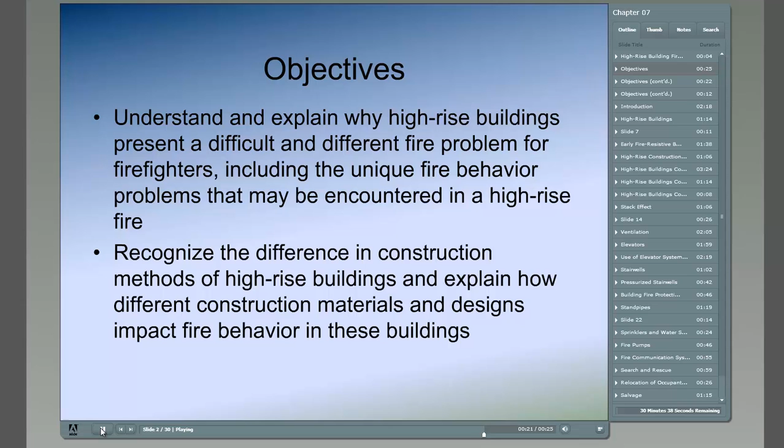The objectives of Chapter 7 are to understand and explain why high-rise buildings present a difficult and different fire problem for firefighters, including the unique fire behavior problems that may be encountered in a high-rise fire. Recognize the difference in construction methods of high-rise buildings and explain how different construction materials and designs impact fire behavior in these buildings.

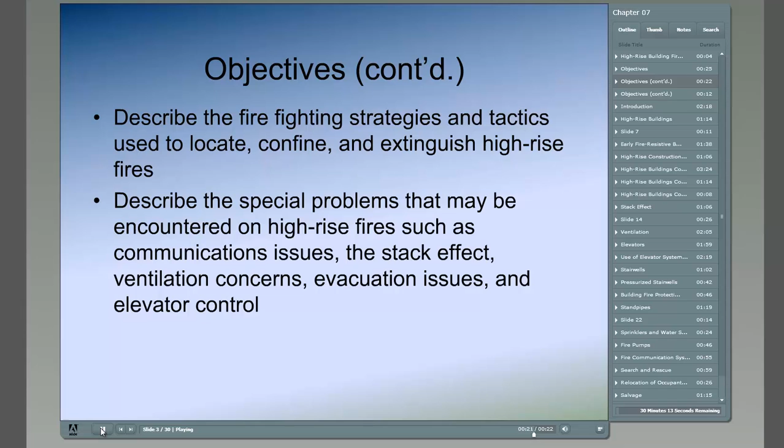To describe the firefighting strategies and tactics used to locate, confine, and extinguish high-rise fires. Describe the special problems that may be encountered on high-rise fires, such as communication issues, the stack effect, ventilation concerns, evacuation issues, and elevator control. To describe and explain the purpose of special fire protection equipment which may be found in high-rise buildings. And finally, to describe when a stairwell support system may be needed.

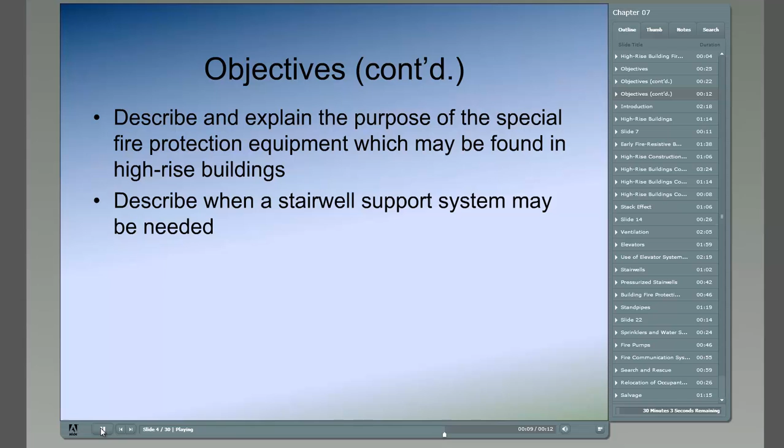Development of vacant land in large cities has resulted in a tremendous increase in property values. As the amount of available land becomes scarce, the cost of land increases, resulting in building developers building upwards rather than purchasing additional land to build horizontally. This upward growth has resulted in high-rise buildings, which are defined by the National Fire Protection Association Standard 101 Life Safety Codes as buildings more than 75 feet in height, where a building is measured from the lowest level fire department access to the floor of the highest occupiable story.

There are variations in code definitions of high-rise buildings throughout the country. For firefighters, the best policy is to check locally for appropriate code to obtain a better understanding of the code specifics. Almost all of the definitions indicate that these buildings have floors higher in reach than fire department ground ladders. This requires fighting the fire from inside the building.

Upper floor fires present firefighters with a different set of problems than those encountered in buildings that can easily and quickly be reached from ground level. While the basic firefighting tactics used on high-rise fires are the same as those used on most other structures, these buildings present special considerations and problems.

The building may contain multiple occupancies, such as apartments, commercial stores, restaurants, and extensive parking facilities. The height of the building presents an opportunity for greater smoke movement within the building. All firefighting equipment, supplies, and human resources must be delivered to the upper floors, a labor-intensive task that requires additional personnel. Access and egress from high-rises can be difficult under emergency conditions, as occupants and firefighters are required during some emergencies to use the same stairwells to exit and enter the building.

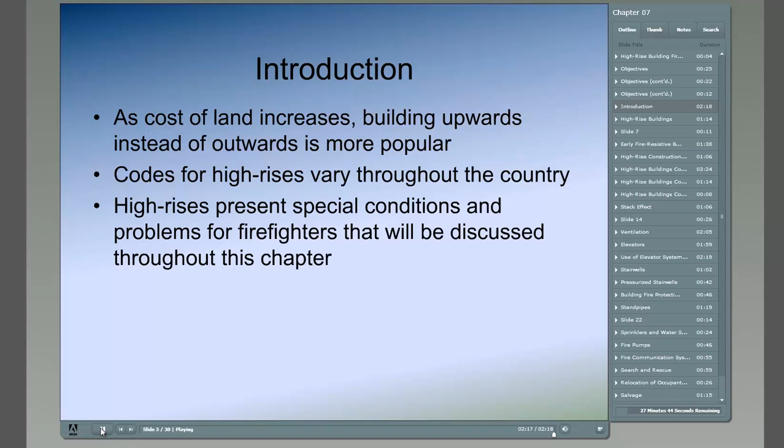According to the National Fire Incident Reporting System, NFIRS, for the period from 1996 to 1998, there were 15,500 high-rise fires in the United States. These fires resulted in $252.3 million in annual property loss and 930 civilian injuries, including 60 civilian deaths. While 75% of these fires were in high-rise residential properties, they caused only 25% of the total dollar loss. The main reason for this is that high-rise residential fires tend to be contained within one room, whereas 75% of the fires in high-rise manufacturing, industrial, and storage buildings are not contained to the room of origin.

Occupants of high-rise buildings face several important issues in terms of fire behavior and safety. These issues include the manner and materials of construction, as well as the building contents. Firefighters categorize the construction materials and designs of high-rise buildings into three major time periods. Each time period has a distinctive construction design and use of construction materials.

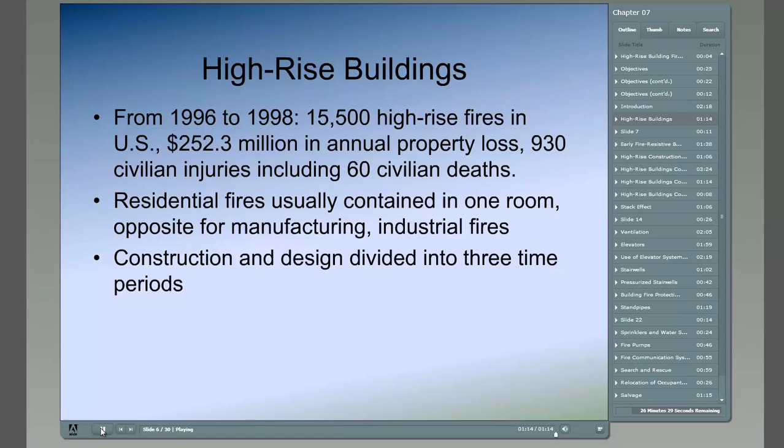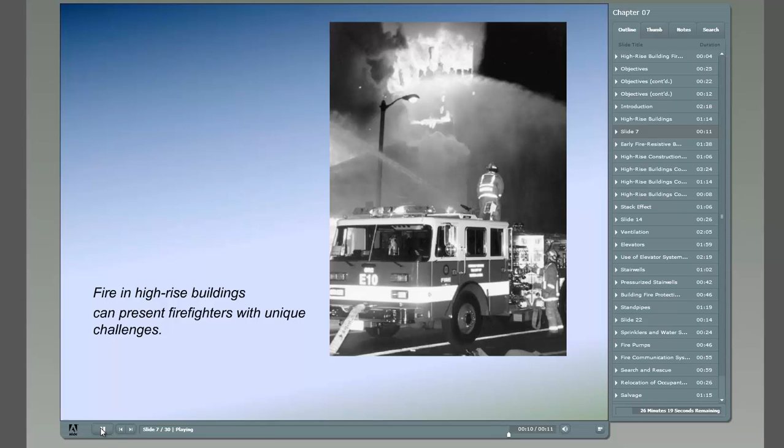Structures built from 1870 to 1920 were constructed with little or no concern for fire safety. At the time, there were no standards for the protection against heat for buildings' steel components. When heated to a little above 1000 degrees Fahrenheit, steel quickly loses its strength. Steel also expands at the rate of 0.06% to 0.07% for each 100 degrees Fahrenheit. This means at 1000 degrees Fahrenheit, it will expand about 9 inches for each 100 feet in length.

In a masonry building, where steel beam expansion is blocked by a wall, the steel can cause a partial or total wall collapse. Some of these early buildings were built with floors supported by concrete piers, which created an open void space where fire and heated gases could move underneath the structure.

To prevent fires from spreading from these open spaces, some building contractors used terracotta tiles to provide fire resistance. These tiles were effective as long as they did not contain holes or poorly cemented joints, which would create open spaces and allow fire to spread. Most construction work used the least expensive materials and workmanship of poor quality, resulting in a fire which would quickly spread throughout the entire building.

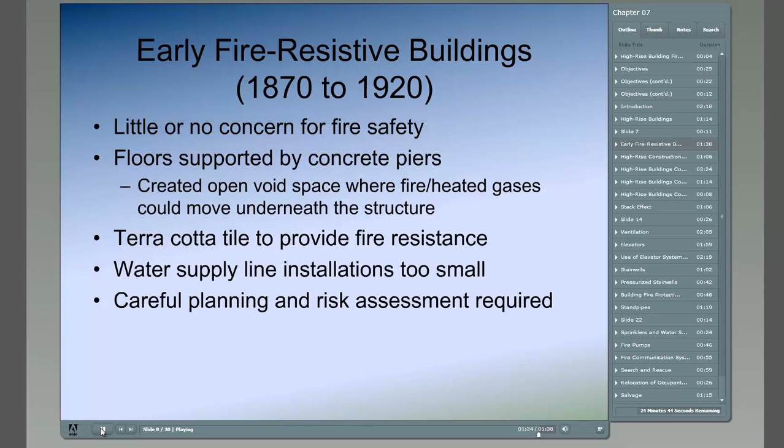Some of these buildings were equipped with standpipes, but most water supply lines were too small to effectively deliver the amount of water needed during a fire. Pre-incident planning is recommended for jurisdictions that have older buildings remaining. Careful planning and risk assessments should be done as well.

Buildings constructed from 1920 to 1960 have important fire safety features that were lacking in earlier buildings and have some features not found in newer high-rise buildings. These buildings were framed and tiled with concrete or masonry for fire-resistant protection. Concrete steel reinforced columns spaced about 30 feet apart supported the floors, and each floor was served by several widely spaced concrete encased steel stairwells.

The windows on each floor could be opened, allowing firefighters to ventilate. Many of the windows leaked air, so movement was within the immediate floor rather than throughout the entire building. A good example of this type of building is the Empire State Building, which was built in 1930.

Its thick masonry walls resulted in the building weighing about 23 pounds per cubic foot, while newer high-rise buildings using drywall are approximately 7 to 8 pounds per cubic foot. The added mass will absorb more heat from a fire than the lighter built building.

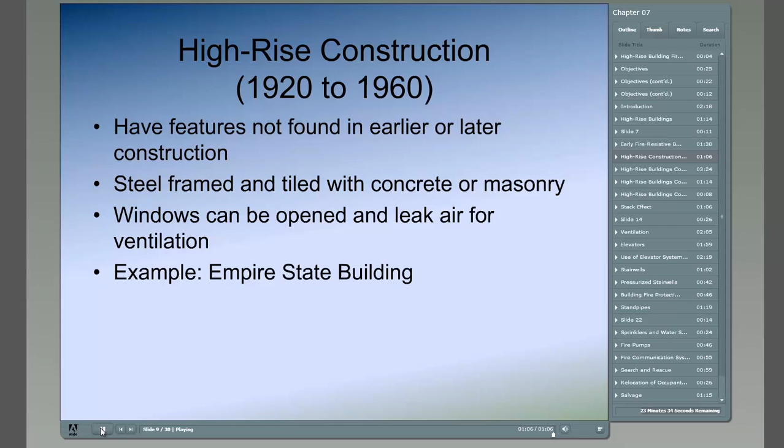Buildings constructed after 1960 are the modern steel and glass buildings found in most downtown areas. These buildings differ from earlier high-rise buildings due to new construction materials, methods, and systems. They use gypsum wallboard and lightweight concrete for fire-resistant protection, and also contain central core construction, using central heating units, ventilation, and air conditioning systems for heating and cooling.

The product called gypsum board has gypsum material pressed into sheets, 4 feet by 8 feet or 4 foot by 12 feet in shape. The gypsum is held in place by two pieces of heavy paper to give it shape. The board can be nailed to wall studs or fastened with screws into metal studs. It is relatively light in weight compared to other concrete products, but the strength quickly fades when the material is wet or suddenly hit.

On September 11th at the World Trade Center, sheets of wallboard were knocked off the stairwell walls by the impact of the aircraft. This caused the displaced sheetrock to block stairwells and trap persons by blocking movement up and down the stairwells. This week's video will go into more detail about that.

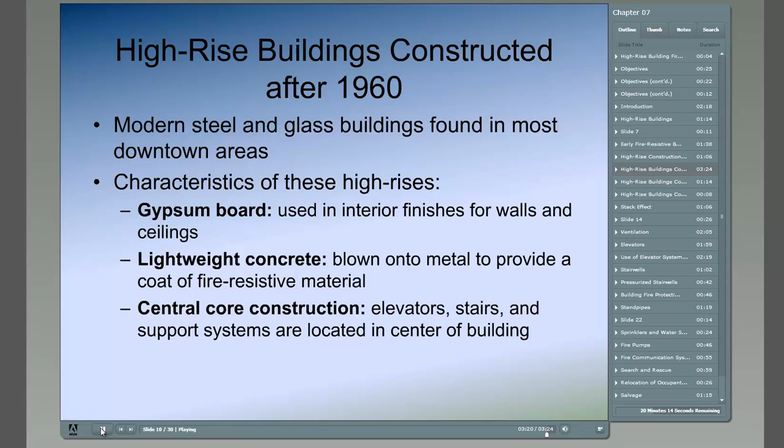Likewise, exit stairways can be constructed at less cost if some of the walls can be used as common walls for elevators and other exits. The idea is to centralize these common requirements in the center of the building, leaving the outer portions of the building available for lease.

In high-rise buildings, the HVAC system must be shut down during a fire or designed with features to protect the system from moving the fire from floor to floor. Fire dampers are installed in the return duct to prevent fire and heated gases from being circulated into other parts of the building.

Firefighters need to know the location of the fire dampers and to follow up and make sure the fire and smoke is not being circulated or spread to other parts of the building when they are activated. After fire has been extinguished, firefighters need to ensure that the fire dampers will be reset for future operation.

The systems in some buildings can be configured so that the total system or a zone within the building can be used to exhaust smoke from several areas and supply fresh air to an area in the event of a fire. This requires a thorough working knowledge of the specific building system and a detailed knowledge of how these systems function. On the other hand, some systems must be shut down immediately, as it will spread fire and smoke to unaffected portions of the building. Information about the HVAC system should be discussed with building maintenance service, and written operating details should be obtained during pre-fire planning sessions.

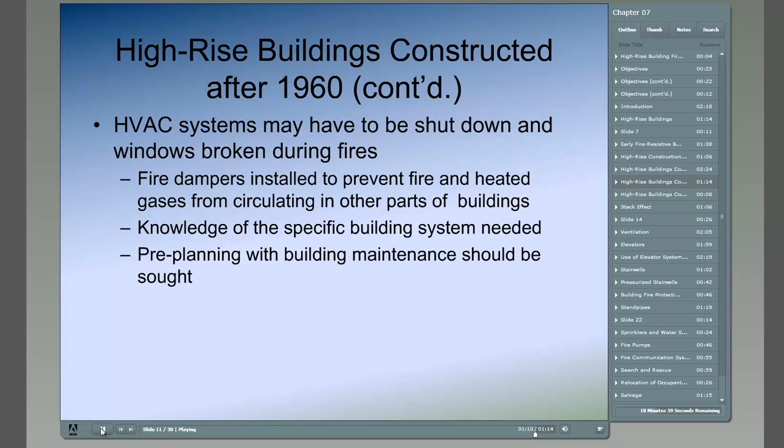This illustration shows you the central core floor plan for high-rise buildings in modern-day high-rises.

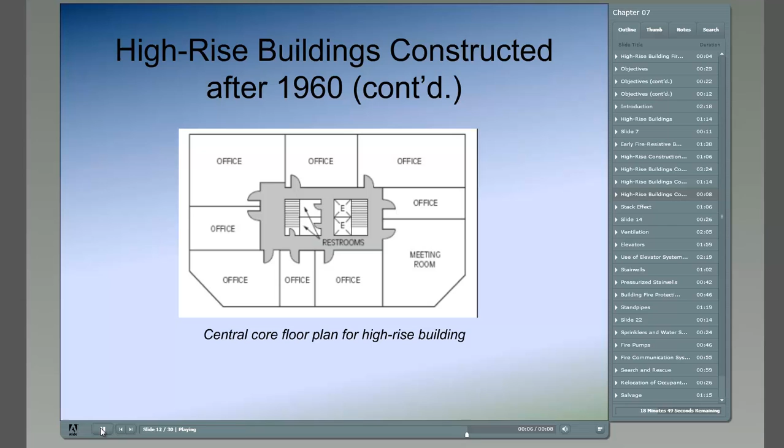The stack effect is a natural movement of air within tall buildings caused by the temperature difference between the outside and the inside of the building. This temperature difference causes the air in the building to rise and fall and varies with the amount of temperature difference. The air movement becomes very noticeable in buildings over 60 feet high and becomes stronger as the building gets taller and the temperature difference becomes greater.

This pressure difference forces heated air in the structure at lower levels up to upper levels until this lighter, heated air reaches a point in the building where the air temperature is equal and the weight of the air is balanced.

The area in the building is called the neutral plane or stratification location, in which the air flows upward and then flows horizontally. For firefighters, this means heated smoke and fire gases will begin to move horizontally, resulting in lateral fire spread. In most cases, it occurs at or close to the middle of the building, as the pressure differences balance out.

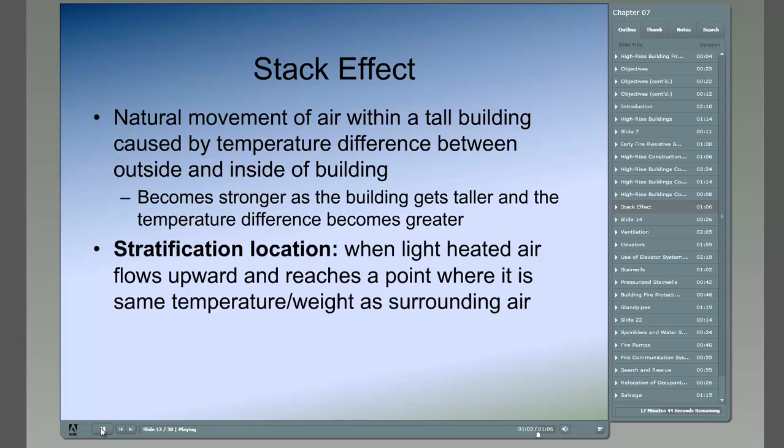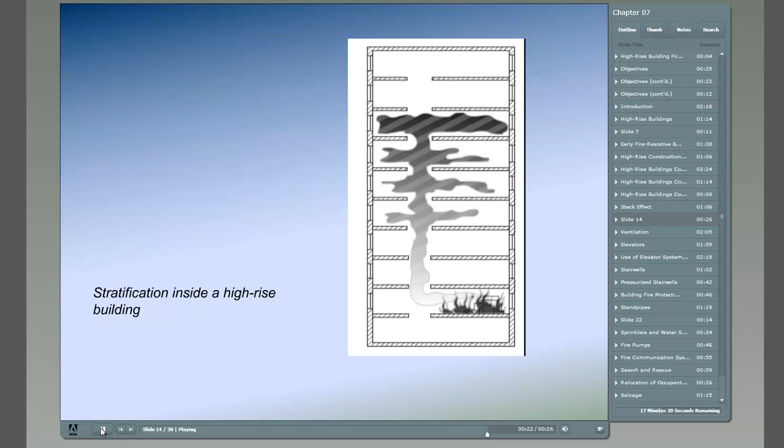This illustration shows you stratification inside a high-rise building. The smoke and hot gases rise in the high-rise until they get to a point where the same temperature and weight of the surrounding air matches the inside and the outside of the building, and that's where the smoke and fire will tend to stay, and this can spread the fire and smoke laterally.

Ventilation is the planned and systematic removal of smoke, heat, and gases from a structure. The reasons for ventilation are to remove toxic gases and to eliminate hazardous health conditions for the occupants and firefighters. This will allow firefighters to locate the fire more quickly and reduce fire and smoke damage.

The traditional method to accomplish ventilation at fires are opening or breaking windows, bulkheads, and scuttles, or cutting a hole in the roof. These methods are not always available on high-rise buildings. In newer high-rises, ventilation is more complex, as most buildings are sealed. Furthermore, these buildings built in the later part of the 1960s and 1970s will probably not have an HVAC system configured to exhaust fire gases and smoke.

Therefore, if horizontal ventilation is not an option, then an enclosed stairwell can be used if it's not being used for occupant egress or firefighter access, and if it contains an opening that can be used to safely exhaust smoke. If a stairwell is available, then the door on the fire floor onto the stairwell is to be held open, and an exhaust fan is used to direct the smoke up the stairwell and through the enclosed shaft and out of the building in a safe location.

All intervening floors not impacted by the fire must be closed, and all other openings should be closed so that the fire and smoke will not spread to other areas of the building.

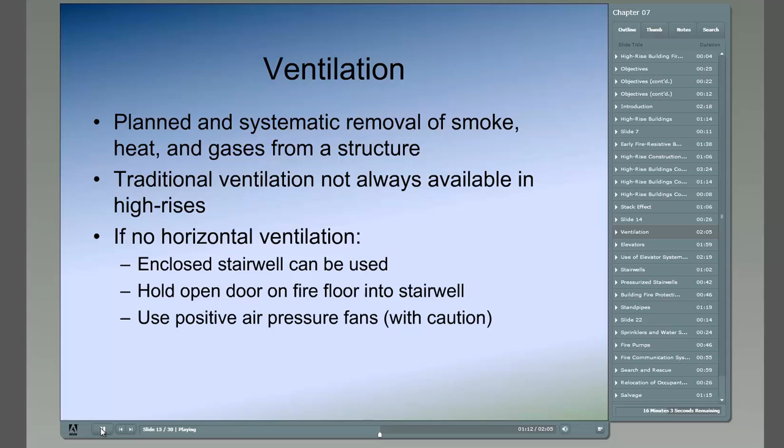Generally, firefighters will attack a high-rise fire using the stairwell on fires occurring on any of the first 6 floors. Fires on lower floors do not warrant the use of an elevator, unless its safety can be verified by sending a firefighter to the fire floor, where the elevator can be inspected for safety concerns. When the incident is higher than the 6th floor, most fire department policies allow the elevator system to be used, only after confirmation of the elevator's safety.

A recent report by the National Institute of Standards and Technology concluded that after traversing more than 20 floors, firefighters were so fatigued they were not prepared for fighting the fire once they arrived. This finding confirms the importance of developing methods and procedures for firefighters to safely use elevators.

Some departments allow elevators remotely located from the fire to be used if there is fire separation between the elevators and the fire area. Firefighters using these elevators move personnel and equipment to the floor below the fire, then ascend the stairway 1 floor, and travel horizontally to the fire. This approach is much safer and easier than ascending multiple stairs. It also keeps firefighters loaded down with heavy, bulky equipment out of the stairwells where civilians may be descending to exit the building.

An understanding of local fire department policies and procedures is important when regarding if and when elevator use in high-rise firefighting is safe, and when it will be permitted.

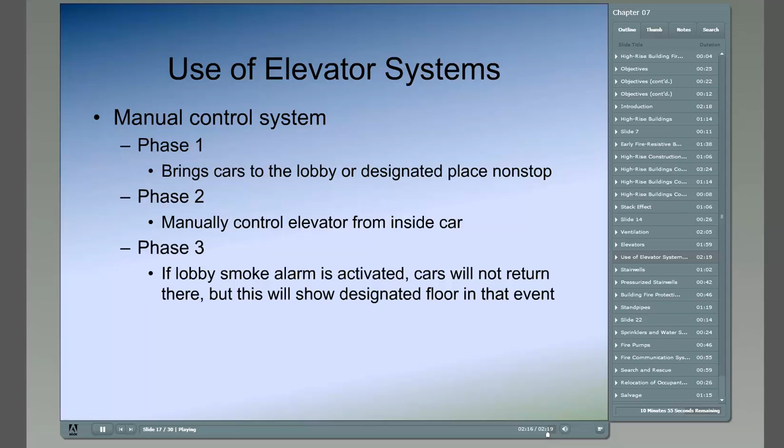In most high-rise buildings, the occupants are generally mobile and are able to use the stairwells to exit the building on their own. However, the congestion of firefighters moving upward into the building while occupants are attempting to evacuate reduces not only the firefighters' movement, but also inhibits the escape of the occupants. One way to avoid this problem is to designate one or more stairwells for occupant egress and one or more stairwells for firefighter operations.

Elevators should only be used if they are safe. If not, a stairwell support procedure must be put into place.

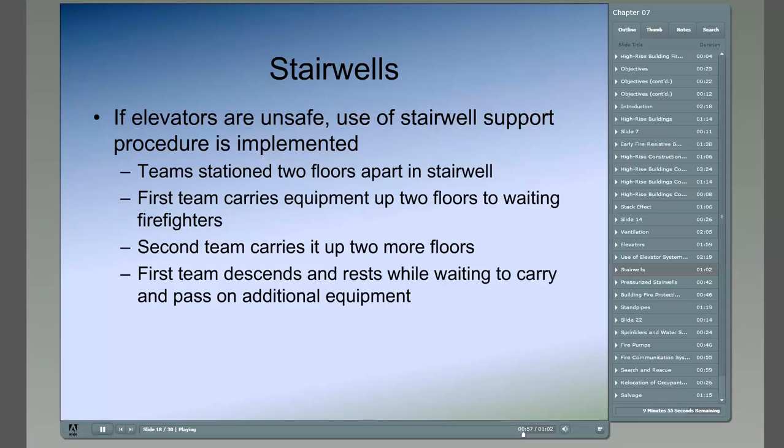Using this procedure, firefighter teams are stationed 2 floors apart in the stairwell. The first team carries the equipment up 2 floors to waiting firefighters, who carry the equipment 2 more floors. In the meantime, the team descends and rests while waiting to carry and pass on additional equipment. While this method requires a large number of firefighters, it is an option available to supply needed resources to the fire attack area.

Newer high-rise buildings have enclosed pressurized stairwells designed to provide the occupants and firefighters a smoke-free environment while moving within the stairwell. The basic principle of a pressurized stairwell is to enclose the stairwell tightly, and then to add a fan to increase the air pressure inside the stairwell.

So when the door or doors to enter the various floors are open, the air pressure inside the stairwell will push the smoke back and keep the smoke in the floor area. In some systems, if too many doors are open at the same time, the pressure reduces to a point that the stairwell fills with smoke. Fire department fans can supplement the pressure in the stairwell if needed.

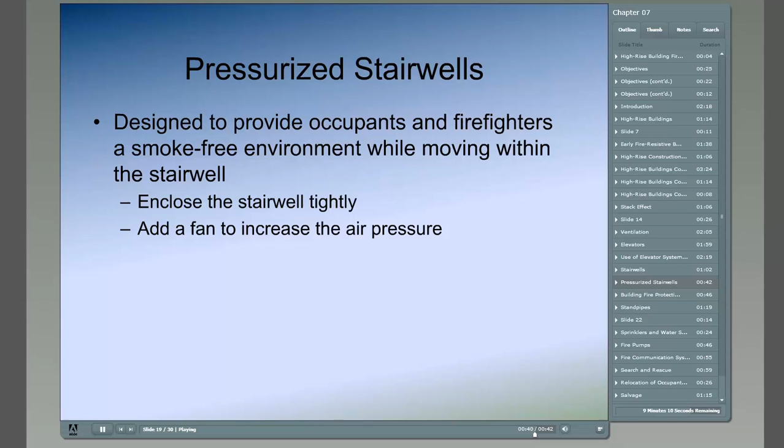Important tactical considerations with fires in high-rises is the reliance of fire departments on built-in systems to assist fire control and extinguishment. Building systems available to firefighters are standpipes, sprinkler and water supply systems, fire pumps, fire communications and command systems, and pressurized stairwells.

These systems are varied and can be complex. Fire departments must master their use in order to bring fire operations to a successful conclusion. A closer look during pre-incident planning at some of the systems found in high-rise buildings is needed so that these systems can be employed properly during fire operations.

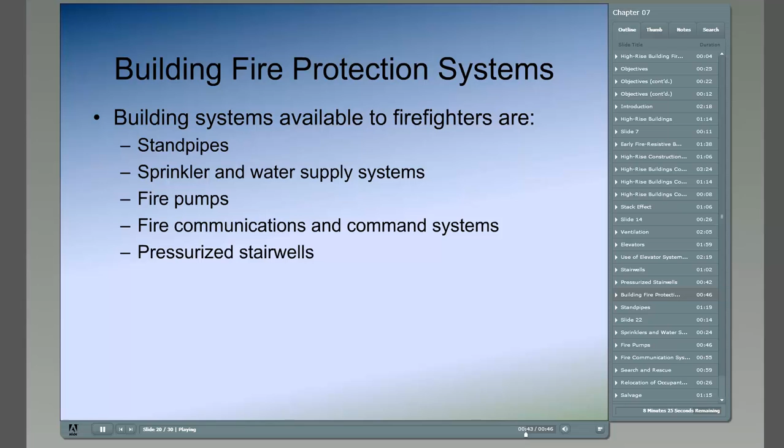Most building codes require standpipe systems in high-rise buildings. Although some buildings are not technically considered high-rise buildings, they should be defined as such for firefighting purposes, as the fire service cannot reach the interior of the building from ladders. As discussed earlier, this definition would include buildings that have stories beyond the reach of available ladders.

One way to better understand standpipes is to look at them as water mains that are built into the building with an outlet. These fire hydrants are located in the stairwell of every floor. Firefighters connect into the hydrant and advance the hose line into the fire floor from the stairwell. On the outside of the building, the standpipe connections is where the fire pumper connects to the pressurized water main.

Pre-incident training exercises are a good way to determine if a building has a workable standpipe system. Because the fire pumper is set to 1 pressure, the pressure at each floor will vary and in some cases be too high for firefighters to control. Therefore, in some cases, a pressure reducer will need to be installed. Firefighters must ensure their operation and their pressure is correctly set during the pre-incident planning session.

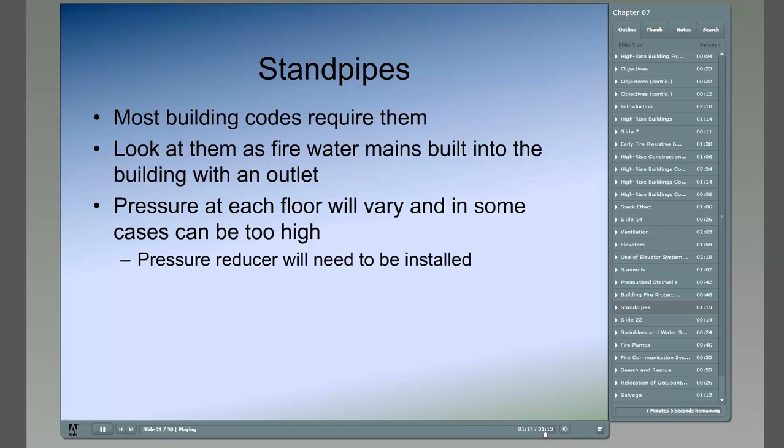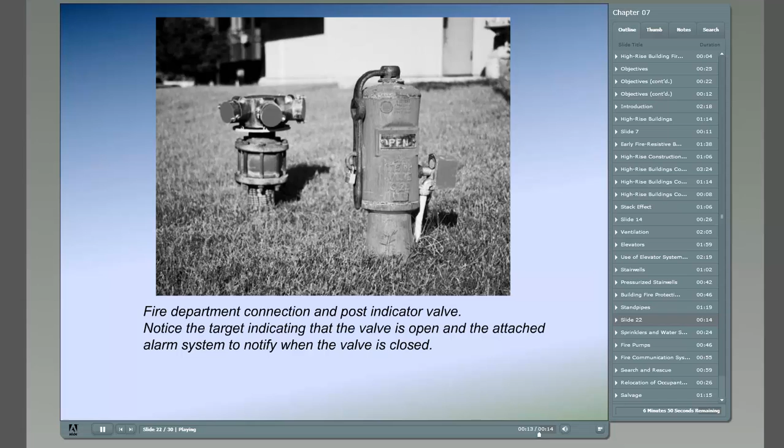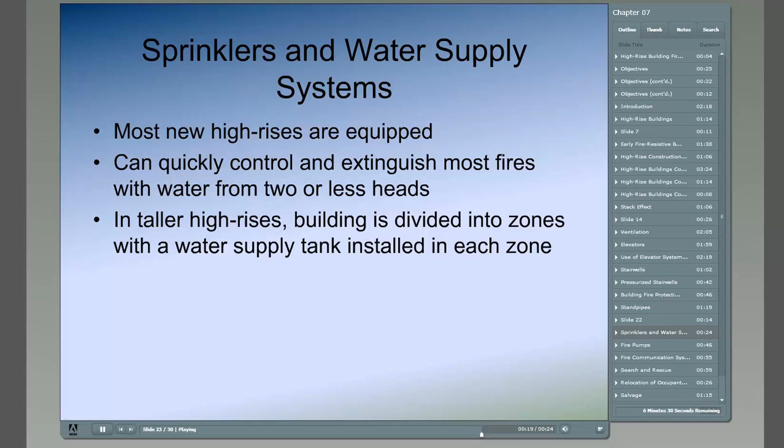Most new high-rise buildings are equipped with fire sprinklers. Because of the height of these buildings, many of the systems are installed in high-rises in zones so that fire pumps can provide sufficient water pressure. When properly installed and maintained, fire sprinkling systems can quickly control and extinguish most fires with water from 2 or less heads.

All high-rise buildings are required to have auxiliary fire pumps designed to increase the pressure in the sprinkler and/or standpipe systems. These pumps can be found singularly or in pairs. They are designed to start when the pressure drops. When a sprinkler head or standpipe valve is opened, decreasing the pressure in the pipe. The pressure decrease causes a switch on the pump to note the drop in pressure and starts the pump.

Although some systems may be more complex than others, the firefighter should know how to operate it and have a basic understanding of fire pumps. It is essential that the inlet and discharge gauges be checked, and it is critical that the bypass valve be left closed after pump testing. 50% of the pump capacity can be lost with an open bypass valve.

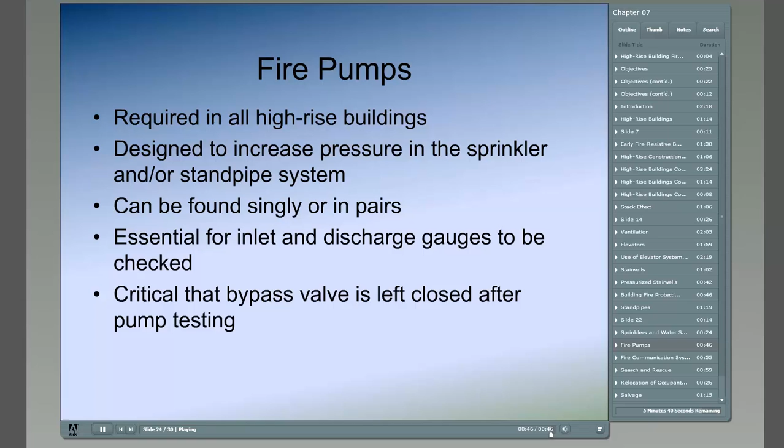In most post-fire reviews for high-rise building fires, the issue of poor fireground communication is most often raised. The reason is that high-rise buildings are built with steel columns and beams, enclosed with concrete, which absorbs much of the energy from the fire department radio communication systems. In many cases, the steel and concrete enclosure makes emergency communication totally ineffective.

To resolve this problem, newer high-rise buildings have communication systems built into the structure. These installed communication systems use hardwiring that allows intra-building communications using a series of highly reliable speakers and telephone devices located throughout the building. The system allows the fire department to direct occupants during evacuation and allows the incident commander to speak directly to the operations and division chiefs.

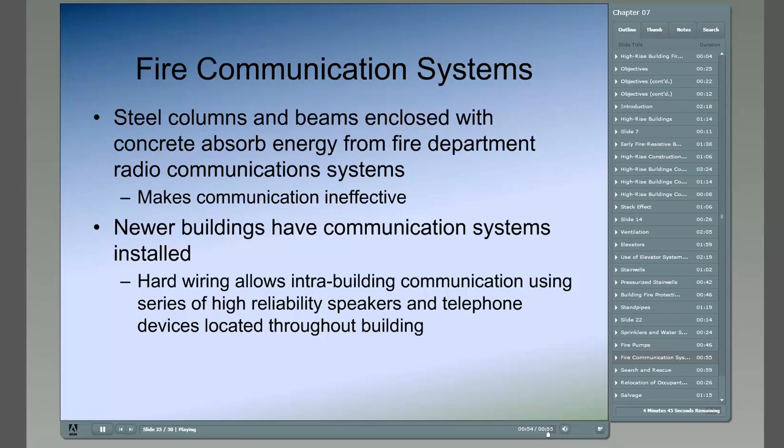The key to successful search and rescue efforts in high-rise buildings is the same as other buildings. Establish a systematic search method to ensure all areas are checked for remaining occupants, and set up an accountability system to account for those found and those missing.

Firefighters need to be aware of a behavior called convergence cluster behavior. This was first observed in 1980 at the Las Vegas MGM Grand Hotel fire. Convergence cluster behavior occurs when occupants feeling threatened by fire converge together to feel safer in the presence of others, resulting in a group in one area or room rather than people waiting for rescue in their separate rooms.

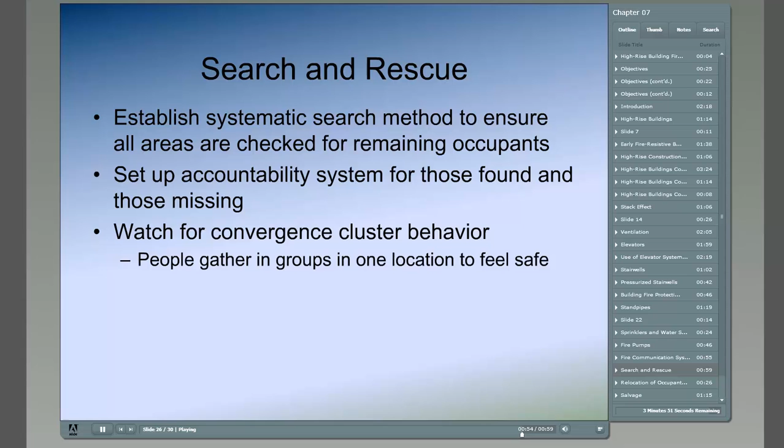On some fires, firefighters have wasted time and effort searching vacant rooms, only to find all persons gathered in one location. An accountability system is needed to verify the whereabouts of all occupants.

Total evacuation of high-rise structures during firefighter operations is generally neither practical nor feasible. The primary effort depends on the number of people needed to be moved, how they can be moved, and if a safe refuge area is available within the structure.

An example of this is providing safe areas or zones in hospitals, as patients can be moved horizontally to another safe zone within the building.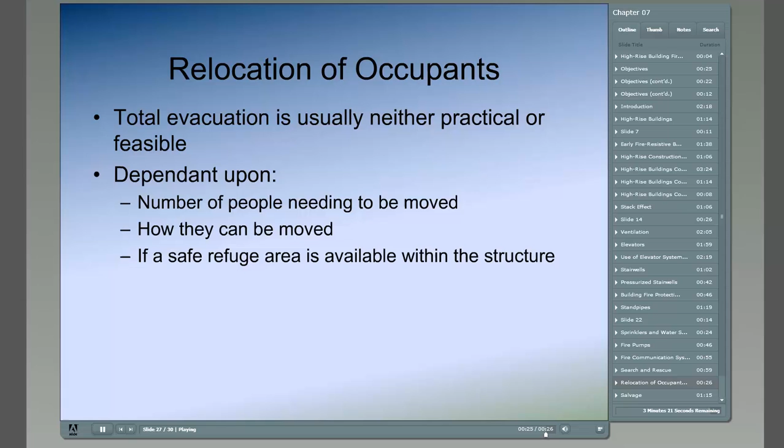High-rise office buildings, hotels, and apartments typically have valuable contents, such as computers, office equipment, business records, and personal items. The owners and occupants may request assistance in obtaining these items. When, and if possible, it is important for good community relations to make every attempt to assist these individuals.

The height of the building comes into play in an opposite way when we consider property conservation. In life safety and fire extinguishment, people and property above the fire are normally considered to be the most at risk. Fire, smoke, and heat will first affect materials on the fire floor and the floors above.

However, the greatest need for property protection is generally downward, as water flows through stairs, walls, utility chases, electrical fixtures, and other openings, damaging and destroying more property beneath the fire. In addition to protecting valuables with covers, firefighters should channel the flow of water down the stairs or through drains. Like life safety and fireground operations, property conservation operations must be well planned and systematically executed to reduce loss.

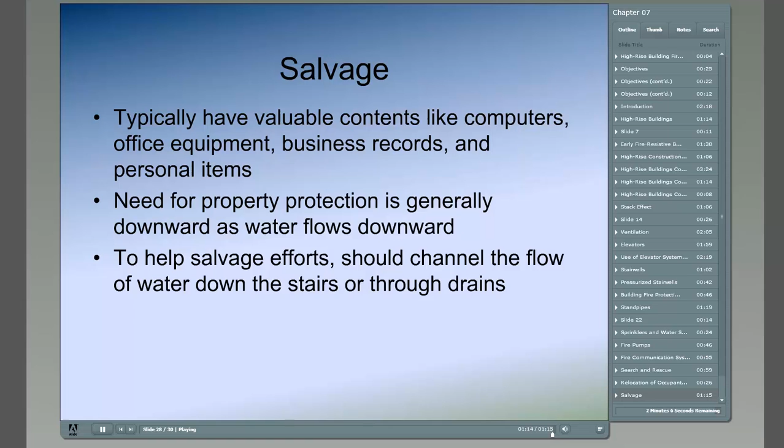Overhaul of high-rise buildings is labor-intensive. A good pre-incident plan helps determine where to direct initial overhaul efforts. The pre-incident plan can direct firefighting forces to hidden shafts that need to be thoroughly checked, as well as false ceilings, which should either be pulled down or opened so areas above them can be checked for fire extension.

Crews should be assigned to every floor above the fire to check for smoke and possible extension. Additionally, crews should check areas below the fire to verify complete extinguishment.

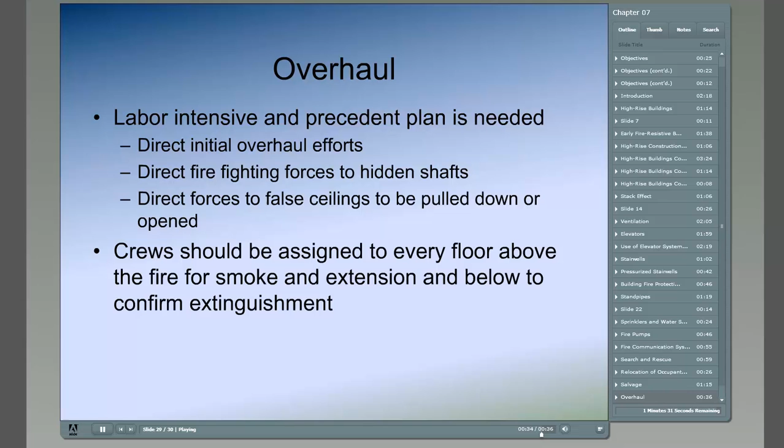High-rise fires in the United States are becoming an increased and significant fire life safety problem. Looking at U.S. statistics for fatal high-rise fires in offices, hotels, and apartments, there were more fatal fires annually in apartment high-rises than in office and hotel high-rises. The hotel and office building fires get the most attention because a large number of people are often killed in a single incident.

There are a number of significant differences between ordinary structure fires and high-rise structures that make firefighting in these fires difficult. Almost universally, communications inside them is poor. The height of the building inhibits the use of ground ladders for easy entry into the upper portions of the building, and the use of elevators is dangerous if the proper safety procedures are not used.

Ventilation of enclosed high-rise buildings is another problem, as the movement of hot fire gases can spread into areas not affected by the original fire if ventilation is not properly conducted.

Firefighters need to be aware and know how to operate special equipment found in high-rise buildings. Special attention needs to be given to determine if convergence cluster behavior is occurring and if problems related to evacuation can be resolved by relocation. Salvage and overhaul operations will need special attention and careful planning to reduce smoke and water losses.

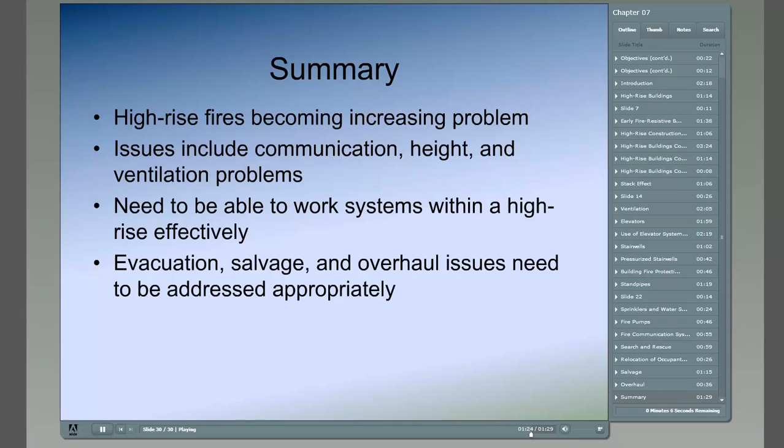And this concludes Chapter 7, High-Rise Building Fires. Thank you.